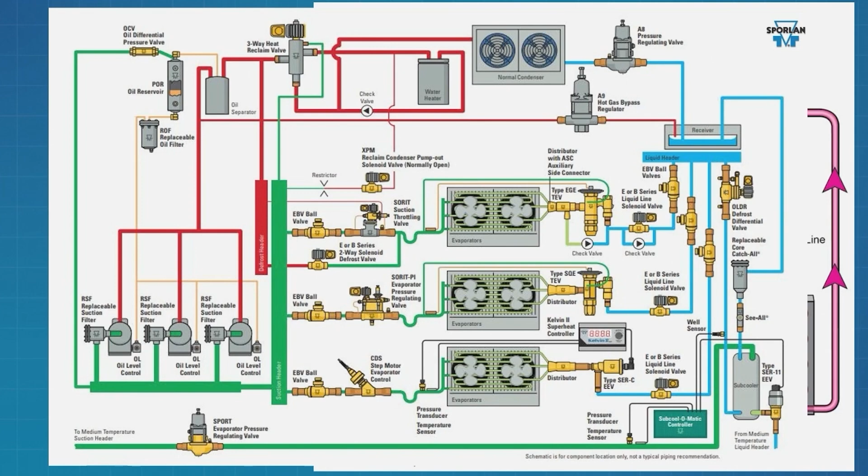So that's the concept, that's what we're going to be going through today. The chunk we're going to cover today, we'll see how the time goes—we'll drag this out if you guys have a lot of questions, and if you don't, we'll speed through it and move right along. There are really 4 parts of the refrigeration cycle and 3 major pipes between them. We're going to cover one of those parts and some of those pipes—that's about as far as we're going to get, and then we'll do this again next week. We'll pick up and take it until we get all the way through. Does that make sense?

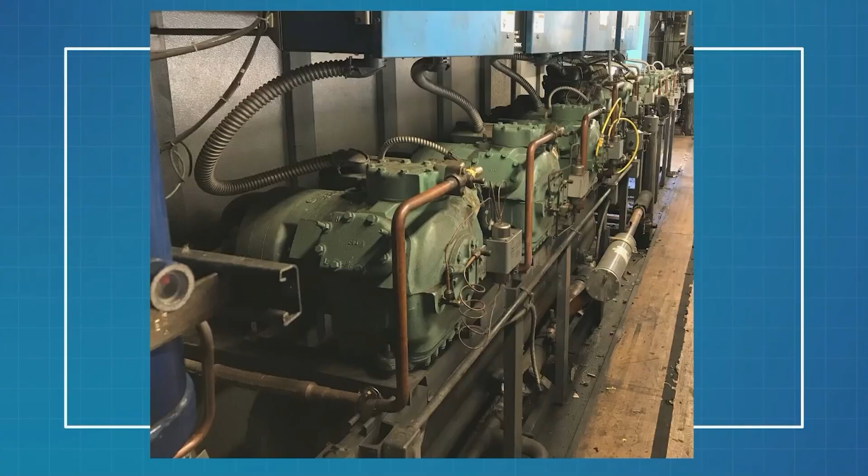The first question is, what is a rack? When we're all talking about a rack, you hear supermarket guys just say rack—what is that, what are we talking about? Well, here's a traditional rack. This is a pretty common setup, and really the concept here is we're taking a bunch of semi-hermetic compressors and putting them on a metal rack. That's where the term comes from. It doesn't necessarily look like that anymore—some new stuff definitely doesn't—but that's where the term came from. It's just a metal shelf that our compressors actually sit on, and that's why we call it a rack.

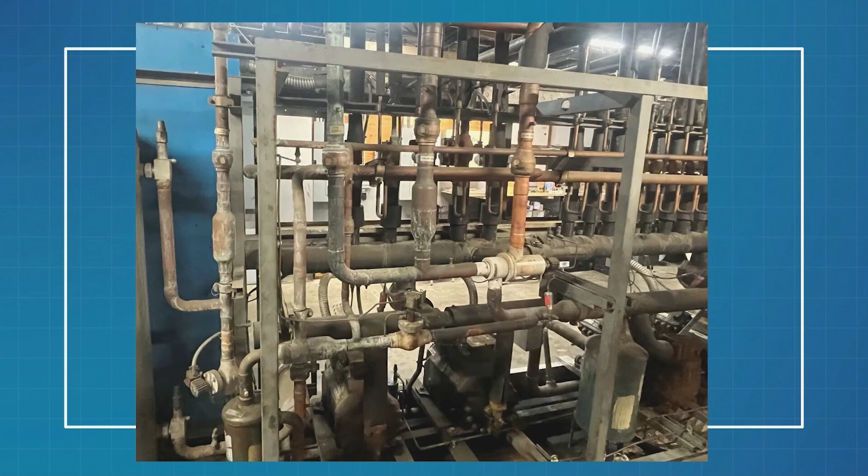So the other thing that's really common when we talk about a rack system, once we line out all of our compressors, we're going to tie them all together. We're going to do that through common headers. The header is a pipe that we run that ties their suctions together, so all the compressors share one suction, all the compressors share one discharge. That's what this picture is demonstrating. I've got compressors, and I can see these little pipes coming down from one common pipe. We call that pipe our header, and we're gonna have one for suction and discharge.

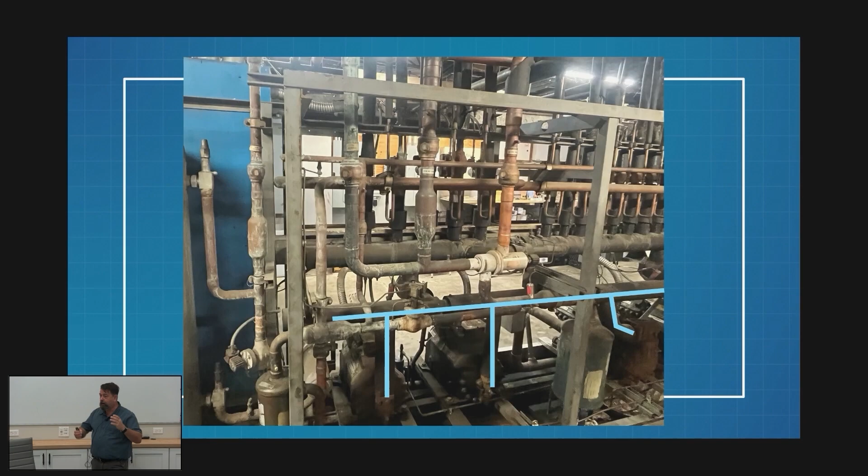So that changes the dynamics of my compressor. Once I take it from being on an individual circuit and pipe it together this way, I'm gonna get an average suction now. Instead of, as my box gets colder and colder, my suction pressure falls - that's what we're used to seeing on a single circuit - that's not gonna happen anymore, because now I'm averaging everything out. So as my box gets colder and colder, my load lightens, and instead of my suction just falling, I'm gonna turn off a compressor and maintain. So things start changing once we pipe them together this way.

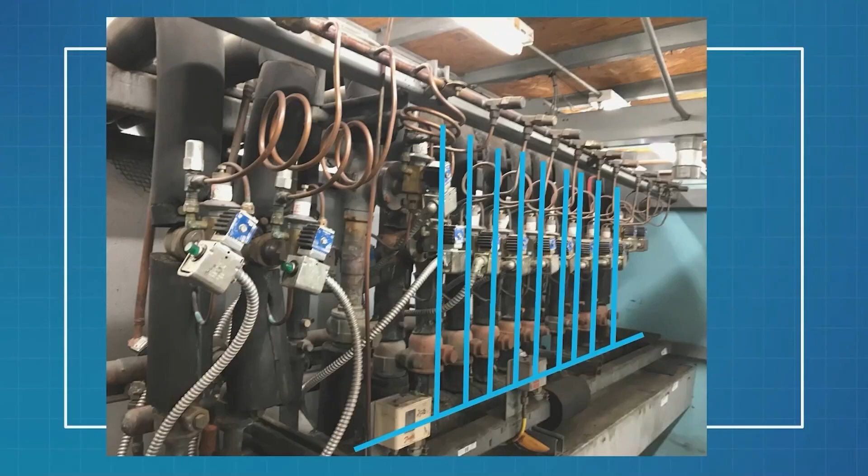The other thing that we're gonna do is the same thing for our load. Normally, on an individual circuit, I got one suction pipe that goes to one evaporator - that's kind of the standard setup. When I go to a parallel rack system, I'm gonna bring in all of my suctions, tie them into one common pipe, and that's gonna tie into that suction header for my compressors. I'll probably have two suction headers, one for my load, one for my compressors, and they will be tied together - they'll be the same pipe. Two physically different pipes, but one big one in between them, making them the same.

For you guys that aren't really familiar with supermarkets, each one of those pipes, each one of those blue lines, represents a circuit. There's probably up to 6 cases on each one of those lines. So just doing some quick math there, you can see 40 or 50 evaporators, something like that, is not uncommon. We can get up to 80, 82 to 85 is a large store rack system. They can go all the way down to 12. We've seen some pretty small stuff too. So it all depends on what the store needs.

So when we're talking about a rack, that's what we're talking about. Everything we're discussing today is that general setup. Now there are lots of variations on that - we're going to talk about the quote typical. What do you expect to find when you walk into a store and it's a supermarket? There's going to be variations, and here's the exciting part about this business: it's very uncommon that you find two systems exactly the same. There's going to be something different. Each one can be customized. Each one has had different things done to it over the years. Each one's trying something new. Each one's got - we just decided to sell lobsters here, but we're not down the street, so it's got a different setup. Those kind of things happen. So there's a lot of generalities that are the same, but a lot of each store is unique.

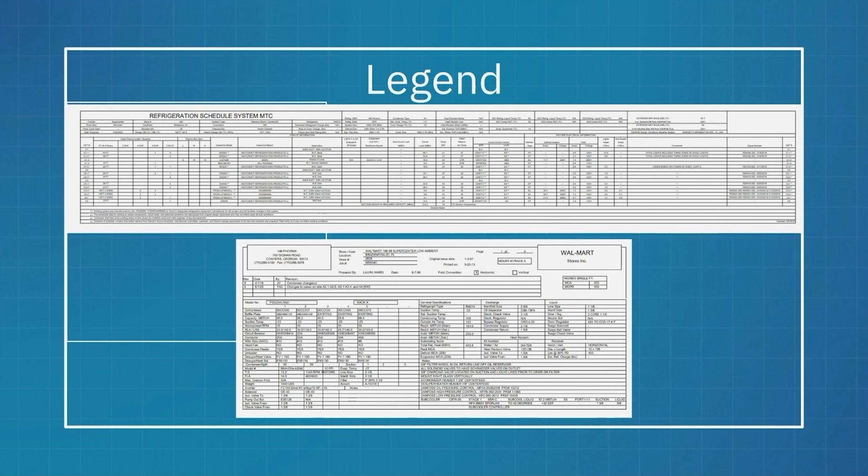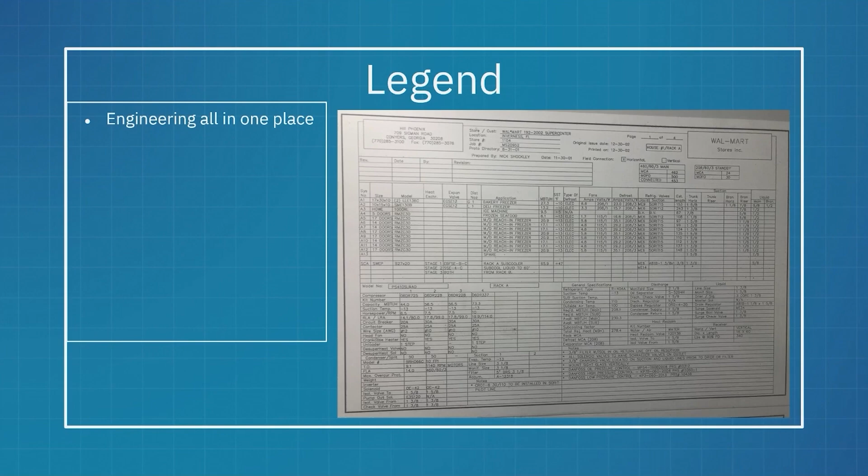My service techs walking into the 1984 store, probably not so much. This is what you're going to find instead. This is the bread and butter of a service tech. We call this the legend. I know you all thought I was the legend, but really that's the legend. Yeah, they don't get any better, by the way.

So the legend is taking that engineering we just looked at right out of the blueprints, and it's putting it in one place on one sheet. This should be mounted physically to the rack, and there's lots of different versions based on the rack manufacturer and the engineer who did the blueprints. But every rack came with this piece of information at some point. Now, whether it's been updated for new cases installed or not, that's up to the contractor who did that work. The engineer provided it.

But sometimes they don't get stuck to the door. If not, at least I know how it started. So let's go through it.

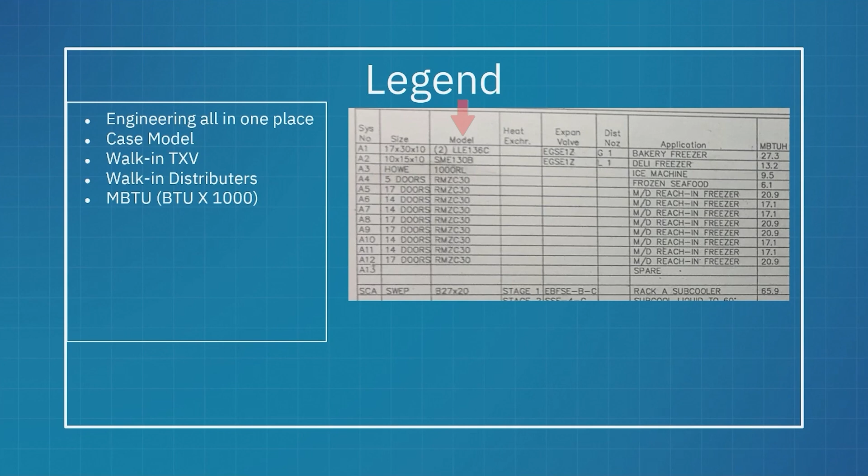Let's talk about what we're going to get out of this thing. In that case information, in that first top left-hand chunk, one of the biggest, most useful things I'm going to pull out is the model number for the case, which sounds ridiculous, but we do reskins quite a bit. When a case gets very beat up, we replace the sheet metal and the tag either disappears or may be wrong. Somebody had to print them out and stick them on the case that wasn't the case manufacturer, so it's very often that that's just not right. Case model number, right there.

Here's another one. How many times have you guys been working on a TXV in a walk-in box and wondered, is that the right TXV? Model number - Ryan has. Model number's right there. It's on the legend. You don't have to guess, you can look it up. It's right there.

The distributor - should I have number 1 or number 2? It's on the legend. You don't have to guess.

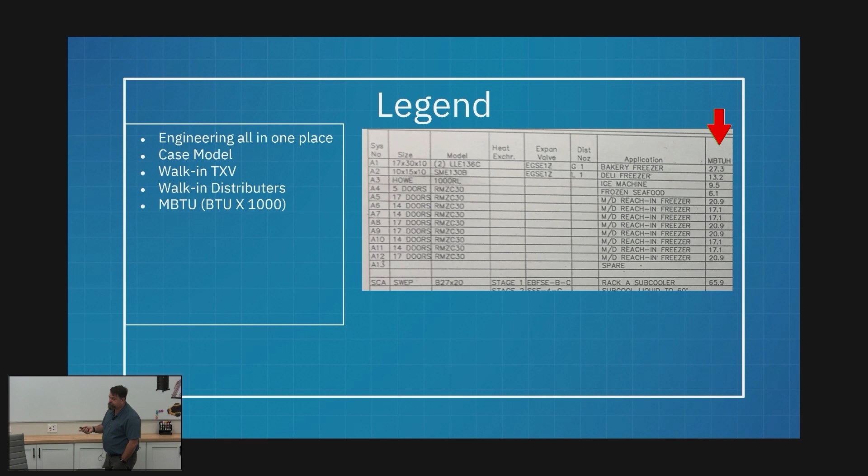The BTUs. So first off, on a legend, all of my BTUs are going to be written in MBTU. I just want to make sure you guys all know that's times 1,000 BTUs to get BTUs out of MBTUs. When we start looking at some of these loads, I think a lot of you will be surprised who haven't been looking how big these loads are, or how small actually. Some of these are quite small when we think they're gigantic - it turns out that they're 2 tons or 2.5 tons. But that's because our suction pressure runs much lower in refrigeration.

Teacher, question - this is just what you were talking about earlier, not a big deal. I was trying to get clear on my knowledge - you said a parallel rack. Correct. So my understanding back in the day was a parallel rack - you have 4 or 5 compressors, but they're all the same size. So you're thinking parallel because they're all the same size. The term parallel rack, and actually duplex parallel rack refrigeration, is what I'm discussing.

The term parallel comes because they're piped in parallel, not series. For instance, a compound cooling compressor that pulls in low, discharges interstage, sucks that back in, and then discharges out - that's series. A compound rack that does that, you've got 2 or 3 compressors that are low temp, they discharge to a mid-stage, then they use that mid-stage as suction for 3 more compressors and pump it up the rest of the way. It's not a parallel rack, that's a series - that rack is in series. When my racks have compressors all using a common suction header and a common discharge, they are piped in parallel. And there's your parallel rack.

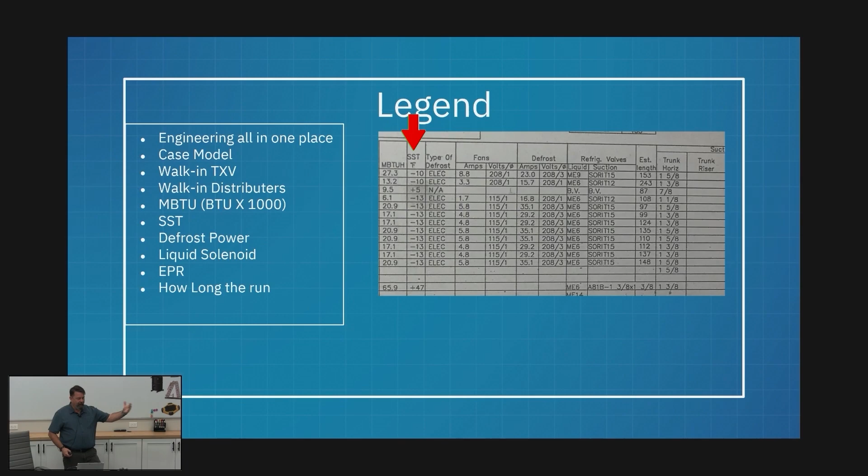Yes, we have customers that require the manufacturer to build equipment special for them. They buy it and say, oh, I love your Cadillac, but you know what, it needs wings. So put wings on it, and then we're gonna put our letter in your model number so everybody knows that one ain't the same as all the rest. Well, we find that constantly. So when you look online and try to get that case information, it's wrong.

The legend's right. It's gonna have your SST. How many amps should my defrost heaters be pulling? How many times have you guys asked that question? I got a heater out, or do I not? The legend's gonna give you that, it's gonna show you.

How about liquid line solenoids? We ran through a string of incorrect solenoids, right? Guess what? They're on the legend. You don't have to guess which size it is, or which EPR is supposed to be there for that circuit. It's on the legend. And then the last one is an interesting piece.

We don't need it every day, but how long is our pipe run? There are times when that is useful. When I'm getting ready to set an EPR and trying to figure out how much pressure drop I'm gonna have from my rack, where my EPR is, to my case, I might want to know, is that 87 feet or is that 215? That might make a difference. I'm gonna have a significant drop with that longer run, and I need to know that. So I'm probably gonna pull it up there.

Another reason I might use that is, I'm gonna pump this thing down, how much refrigerant am I gonna be moving? Look at this thing, it's 1 3/8 pipe and it's 300 feet. Yeah, it's probably not gonna fit in my 25. And the end pipe size, that'd be the next piece.

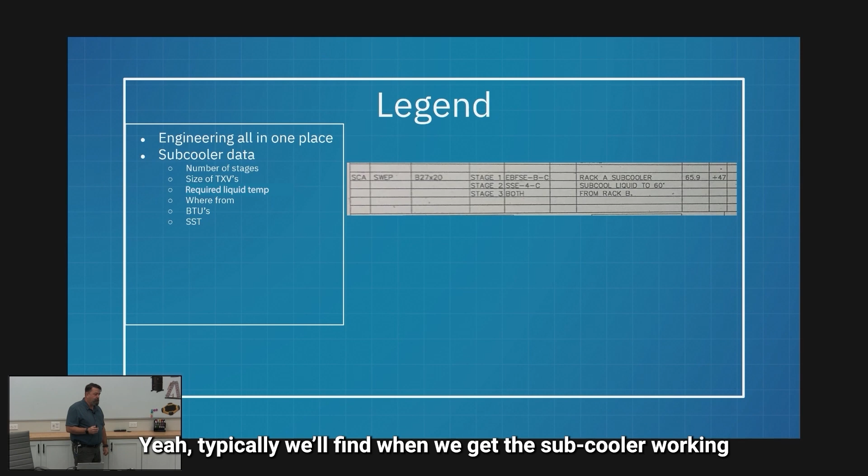The liquid must meet those three conditions before we can even begin to use the superheat data we're getting, before it's even meaningful. Typically we'll find when we get the subcooler working—because they're never working when we go—it's a giant problem.

You end up getting a massive flood back on a lot of circuits, and then if you go to the circuits in Tech Assist and see the work orders generated, there's usually a lot of work orders for that. That's because the subcooler wasn't working, nobody checked it, and you go to the expansion valves—every single one of them all the way open. Or you'll see every single one has a new expansion valve, and that's all the way open too, because they say, oh well, it's not working, I'm not feeding it.

Yep, the new one didn't work either. So change the TXV, open it all the way up, still got 20 superheat, gotta change it again. So why does that happen? What he just described, unfortunately, is not uncommon.

It's actually very common. You know why is that? It's mostly because people don't understand how critical a subcooler is. And that's why we're covering it, and we're gonna cover it in depth in this course. We're gonna go through the subcooler. That's why I'm showing you the engineering data.

All right, we can check superheat, but once again, we don't even know if it matters until we confirm those three things. Well, in order to confirm it is at the right temperature, I have to know what is the right temperature. There is no standard, it's always X. It's not. I think it's common.

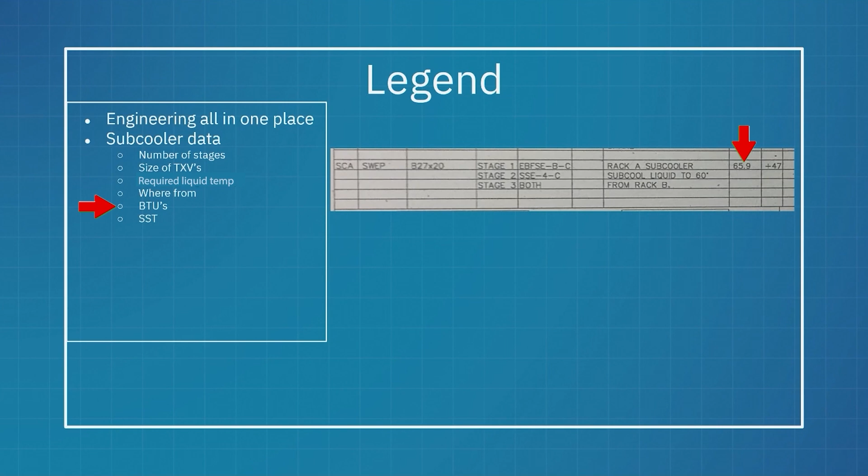So another interesting piece is BTUs. Out there on the right, 65.9 is my MBTUs on this guy. That's interesting. So what does that tell me? That's telling me how many tons of cooling I'm removing from that liquid line.

Well, every ton, every BTU that I pull out of that liquid line is equal to a BTU a compressor has to do. They're one to one. Well, the other interesting thing about this is it's telling me it's being subcooled from B rack, from a different rack. So that means I've got

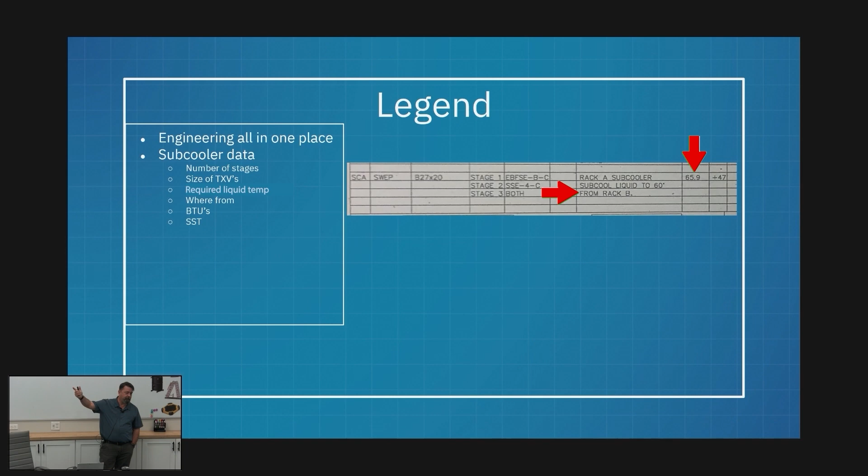65.9 MBTUs of work that's being done by a different rack. Let that sink in for a minute. That means if my subcooler's not working, it's turned off, that's 65.9 MBTU of compressor I need on this rack, I don't have. Oh, I don't have enough capacity. That's a problem. So if I want to know how much capacity I'm short, my MBTUs are right there.

That's about the only thing we're going to use it for, is figuring out what's going to happen when I turn this guy on, horsepower-wise. Or if I have to shut this off, how big of a hole am I going to be in? I can look at it and figure that out right there.

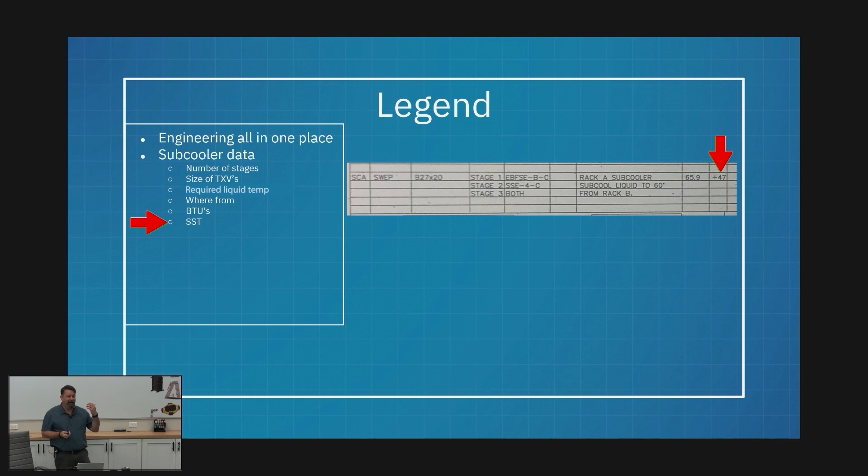The next one, off to the end there, 47. What's my SST on a subcooler? It's got an EPR, it's got a TXV. That means I can set it up just like a case. That means I need to know what its target SST is. This was 47. So this is a low temp rack, this particular legend that I pulled.

It's a low temp rack. 47 PSI, 47 degrees on my PT chart, that's above medium temp. Well, you guys know, we lose efficiency as we drop suction tremendously. So low temp rack, if I'm taking 65, 66 MBTU of compressor off of that, if I put that on that rack running at 7 PSI, you guys know that's going to be about a 20 horse compressor. But if I'm doing it at medium temp, that's about a 5 horse compressor. That's why my efficiency is so dramatic.

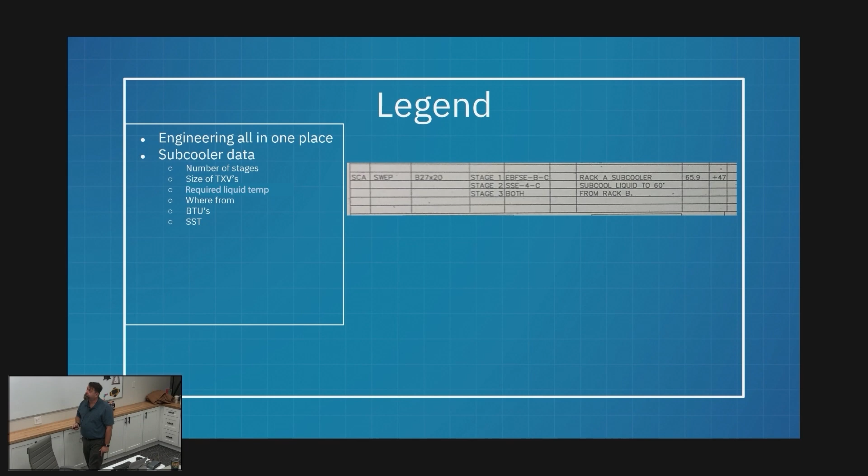That's why I have to use my subcooler. Okay, that's on my legend.

All right, my compressor data. This is one of those mysteries, right? We walk into a rack and I've got a compressor staging wildly, and this one's bigger than the guy after it. Doesn't make sense. Looks like somebody put the wrong compressor in. Happens. We get technicians who lose a compressor, they go to get one, they need it, it's an emergency. The rack's not maintaining. They call: we don't have a 228, but I got a 337.

Yeah, what's your pipe size? Yeah, it'll work, send it. Right? Sure it happens. But how do we know? How do we know that's what's going on? How do we know that's our problem or not?

Well, guess what? All the model numbers that are supposed to be on that rack are on my legend. So I can look, is that what I have? If it's not, and the program doesn't know that, it's staging incorrectly. My flows may be wrong. Maybe that's why I've got an oil problem, maybe why the whole rack's shutting off and starting back up, depending how grossly missized it is.

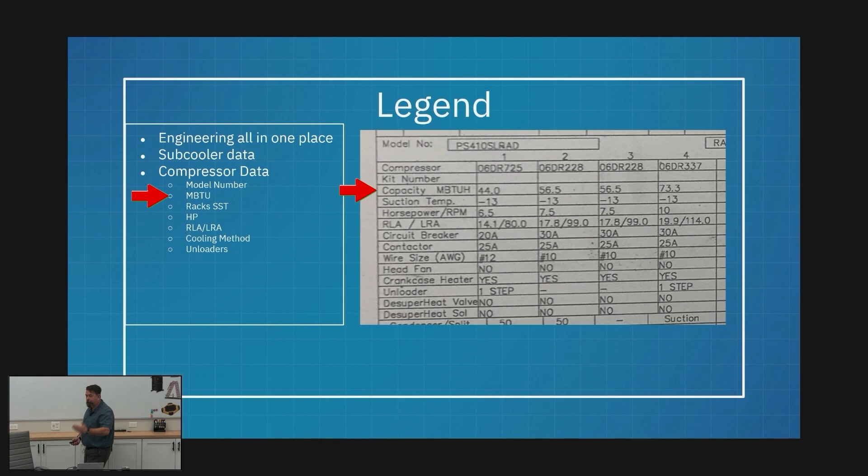But that's going to give you that data right there. It's MBTUs. Once again, this is fascinating - we think of these giant compressors as 20-ton, 30-ton compressors. The question is, at what suction pressure? The lower that pressure gets, those BTUs start shrinking for that same horsepower, right? That's right here - we can look at it and see, this is a 5-ton compressor, not a 20, right? Some of us did that in class recently, we went through that.

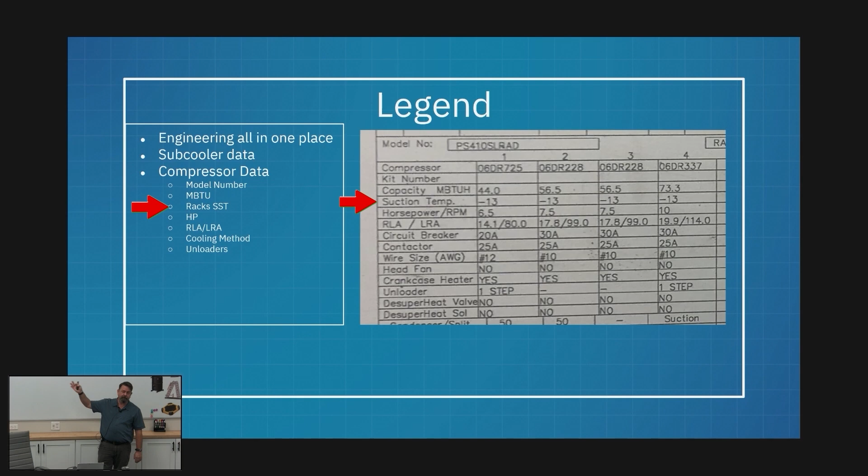The suction temp those compressors are designed to run at - they're all going to match the suction for the rack. This is the first place you can find it. You'll find it in a few places on this legend. But I need to know, what is this rack supposed to be running? I walk up, I'm sitting there at 25 PSI, my target's 25, everything in the store is running 8 degrees warm.

I might come over here to my legend and see what it's supposed to be. Oh, somebody fat-fingered that - it's supposed to be 15. Somebody hit a 2 instead of a 1. How do I know that? My legend right here is going to tell me. This rack is a minus 13 degree rack. It's going to give me the horsepower for those compressors, and it's going to give me all my electrical data.

RLA, LRA - you guys know your lock rotor amps is 6 times your run. I don't know if you guys knew this. Often on your compressor data sheet, it'll give you one or the other - does it give you both? You can figure them out by dividing and multiplying. My legend will have them both though, just so you know. That's true for everything, not just compressors - fan motors, everything else, cooling.

So we're going to talk about cooling and compressors here in a minute. But you walk into a rack and there was a head fan - you can see that somebody has removed the head fan, right? Is it supposed to have a head fan? I don't know, my legend will tell me that. Why would that have happened? Well, either the fan went bad and the tech pulled it and didn't replace it, or I've had a refrigerant conversion and my head compression's changed and that compressor no longer requires that.

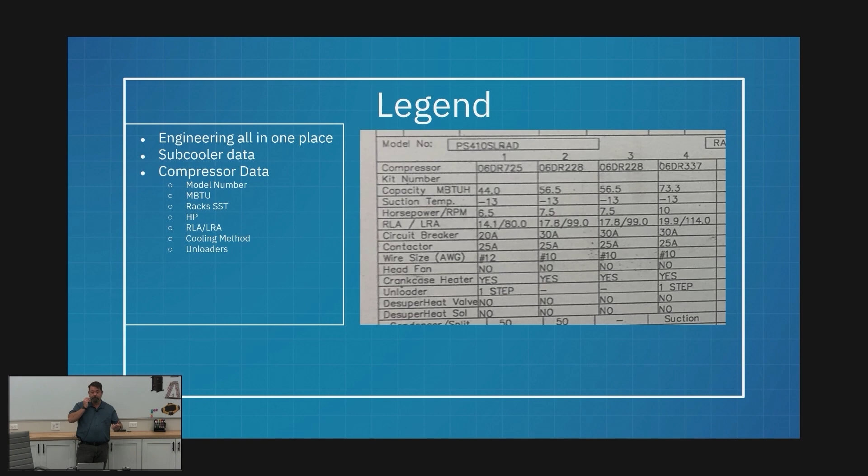But your unloader bolts off the old compressor. You can get a regular compressor and move the unloader yourself. Give them that model number and they've got three in the shop, you can have them in an hour. So just know that - if you've got an unloader, it's gonna slow down your order significantly. If you've got time, it's no big deal, but if it's something we want to get going, have them get you the model number without the unloader and move the unloader yourself.

The other reason I need to know if this compressor came with an unloader is because of that - technicians pull out a compressor with an unloader on it, don't move it, and just put in the regular compressor. Happens all the time. Time crunch, whatever, make 50 excuses, but that's what happens. So I walk in and once again I've got staging problems, and we'll talk about why that's a problem as we get going.

That's one of the things I'll need to know - you'll hear me ask, did you validate your horsepower? What I mean is, when we're looking at swinging suction problems in a heavily cycling rack, do you have the right compressor? Is it the right size? Does the computer agree with the size sitting on the rack? Is that compressor delivering that horsepower? Do you have bad valve plates? Do you have compression problems? If it thinks it's a 20 horse compressor and that compressor's only giving you 15 because one of the pistons ain't moving, we need to know that.

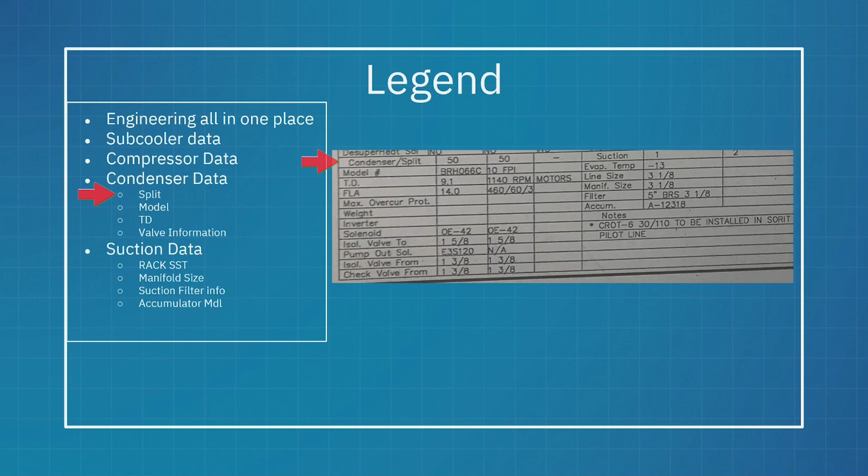The other bits on here are my condenser information. For us down here we'll get into low ambient controls - we'll talk about that, probably won't get into that today. But 50% splits, 25% splits, are they active? Were they installed originally? That's all gonna be in here. Model number - you guys know those 20-year-old condensers, you can't read a thing on that plate, it's just white, you can barely tell that was the plate. Well, the model number's right here, it's on my legend.

The TD - so when I'm trying to calculate, is my condenser working? Does it work? I need to know what my TD is. I'm gonna measure that and know what TD it's producing. Is that right? Four? Does that sound good? Yeah, that sounds great. Maybe it's 12, I don't know - my legend is gonna give it to me, I don't have to guess. That's a summer problem, not a winter problem - that's the 325 head, I'm trying to figure out why.

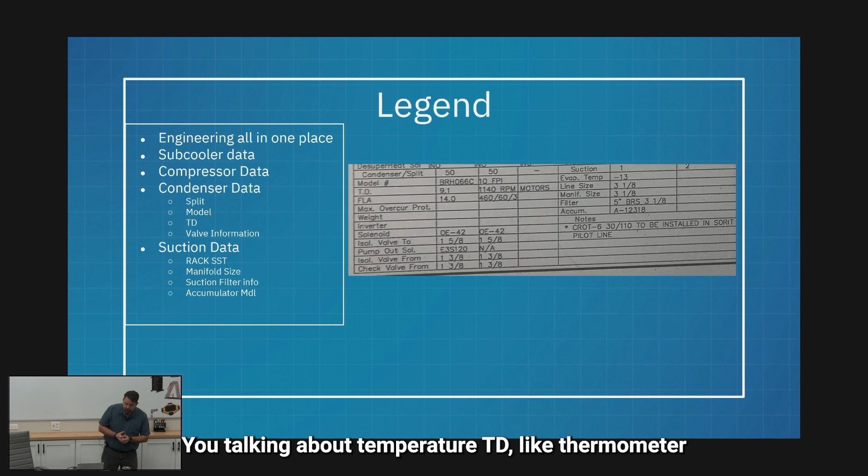That's where I'm at. You're talking about temperature TD, like thermometer? Yeah, my refrigerant coming in versus coming out. Oh okay, so you're saturated.

Not your TD. And then your other—there's a delta T, and is my air blowing through versus my refrigerant coming out.

When we're trying to understand have we lost capacity, are the fins rotted out, if we're not exchanging heat, it's full of oil, something's going on—we're gonna know that by measuring the delta, the air blowing through my coil versus the temperature of the refrigerant coming out. How many degrees is that?

Right, how does that change? Okay, and then the valve information, all right? So there's tons of valves on this thing.

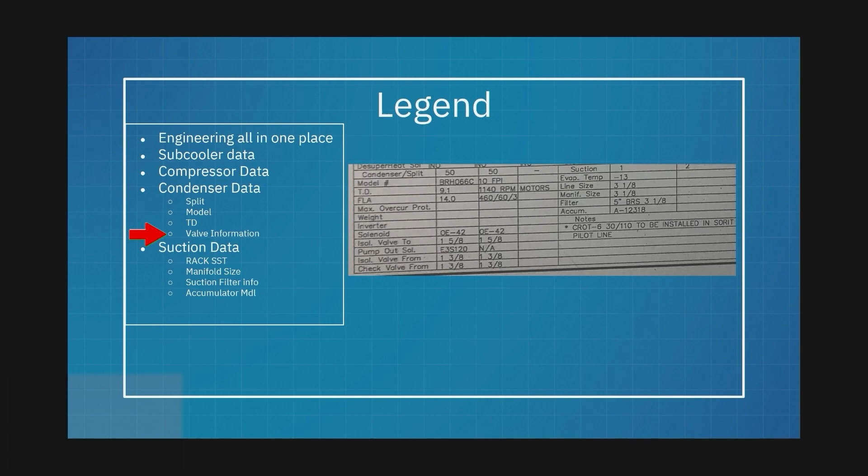I'm gonna have solenoid valves that are normally open instead of normally closed, and we'll talk about that. That means I better get the right valve. Just think about what I just said—hot gas going into a condenser through a normally open solenoid. That solenoid fails, I walk into a store, hey I need 1 1/8 inch. Normally closed, that's what they're gonna give you.

Every time, right? So I gotta have the model number on that. It's on here—the check valves for my 50% splits, on here. The solenoid valve for the bleed off line, it's on here. I don't have to guess, right?

We just went through this whole thing with solenoids recently. Their size matters, right? Their capacity matters—if I'm grossly oversized, it won't close. If I'm undersized, it's a restriction, the hole inside is smaller than the pipe. If that happens and I get the wrong one, it's just not gonna work.

When we're talking about pump out solenoids on a condenser, I don't have any idea how many BTUs that thing's moving, right? Guess what—I don't have to. Somebody else does, and they did that math and typed their answer right here on this sheet.

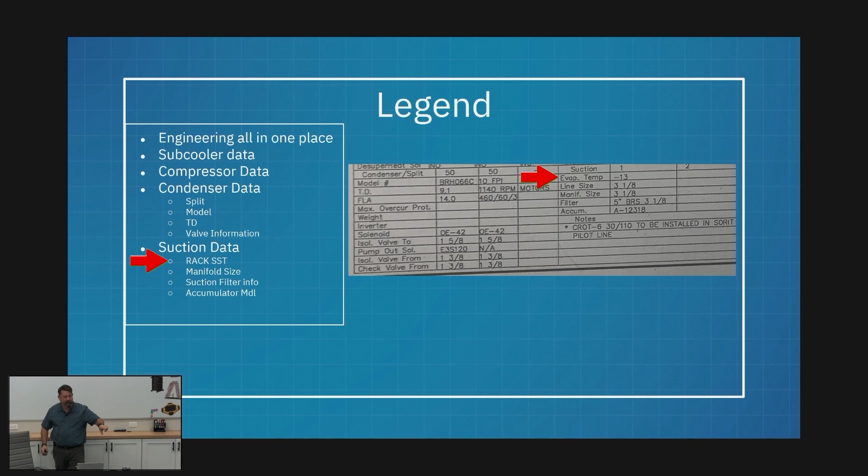Okay, suction data, the rack SST. This is where the official—this is a minus 13 degree rack. When we start talking about racks, what's your rack? I got a minus 25 rack, I got a minus 23 rack. We're not talking about supply air on my coldest case, we're talking about what is that SST target that rack runs at. Remember, our suction pipe is a common pipe between all of my compressors—that's the pressure I expect to find in that manifold is my design SST. In this case, it's minus 13 degrees.

So the other thing I've got to know is my refrigerant type, right? I take my refrigerant type and plug that into my PT chart, and that will tell me the pressure I should find on that manifold. Is that calculated off of midpoint? PT Pro's the way to go.

All right, so yeah, we weren't going to get into this but you brought it up, so here we go. The question he just asked is that based on midpoint? All right, so let's talk about glide for a moment, because this is definitely one of those things that guys stumble on. Talking about glide—good old R22 has no glide.

So when I'm taking superheat, taking subcooling, setting EPRs, setting up my suction on my rack, it's the same number—my PT chart gives me one number, I just use it. Guess what, CO2 is that way too. One of the nice benefits of going back to CO2 is no glide, right?

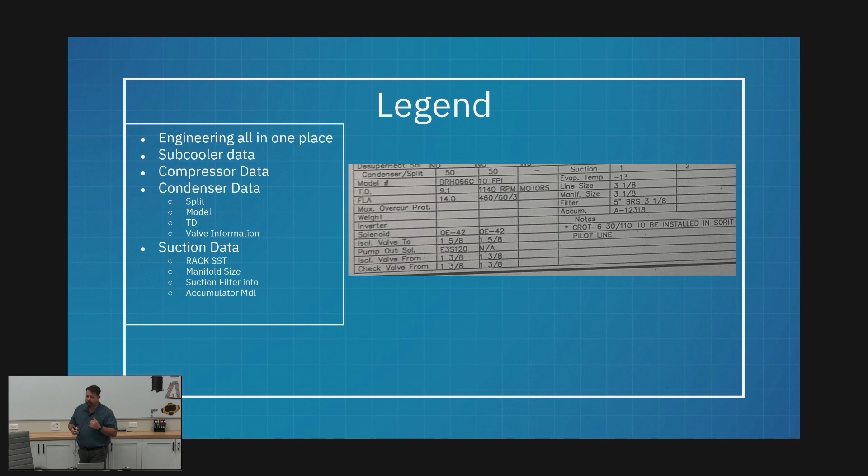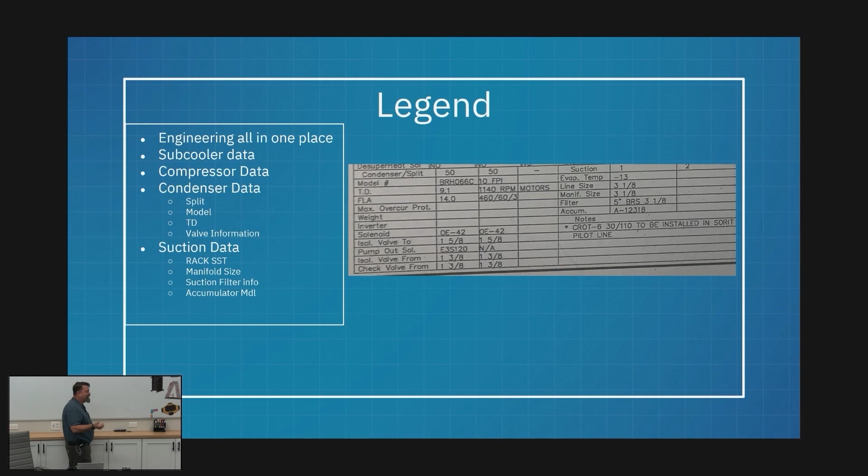Now the other side of that is condensing. The exact same thing is going to happen. It's a different refrigerant, but the one that condenses first is the one I want to measure first. That's my bubble point. So when I'm figuring sub-bub, subcooling, bubble point - subcooling, bubble point - those two go together. That's the other end of my glide. Now that leaves me with one more value that we need.

If I pick up a drum of refrigerant out of my truck and I strap a thermometer to it and hook my gauge up to it, is that going to give me dew point or bubble point? Neither one. What the hell is going on?

Neither one. When I am at saturation, I do not have bubble or dew. I am literally halfway in between, right in the center. At saturation - when I say saturation, I'm talking about having liquid and vapor present at the same time in the same place. If I have liquid and vapor and I add heat, I'm going to boil refrigerant. If I have liquid and vapor and I remove heat, reject heat, I'm going to condense some of that vapor into liquid. That's going to give me a nice, stable, predictable pressure-temperature relationship that we think of as the PT chart.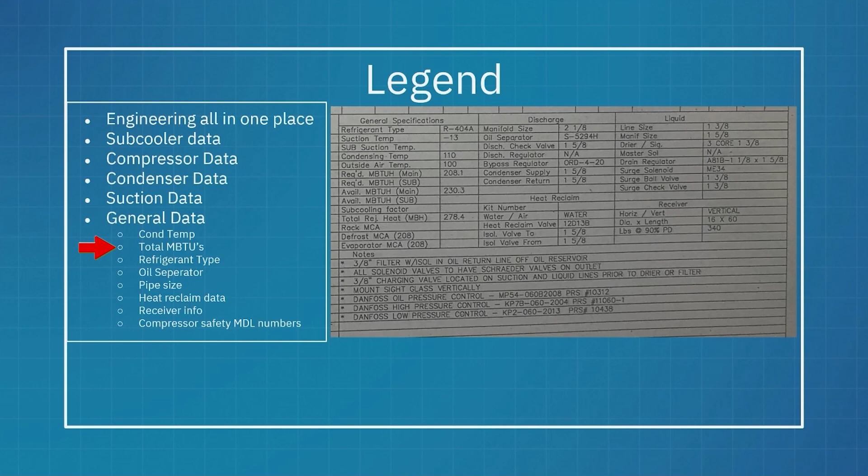Total MBTUs. Interesting to know, it's one of those things we just don't talk about. I got a 40-ton rack, right? I got a 120-ton rack. Do I? I don't know. Never looked. Well, now you know you can.

My refrigerant type, all right, this is the big one. This is probably the most important thing on the whole damn sheet. All right, we change refrigerant types so many times in these stores with these conversions. We're doing it all the time. How many times have you walked into a store and you just didn't know? Right? You look, there's a tag that says R22 on that thing.

There's something that says 404 in the corner, but there's an empty 447 bottle, so then I got mystery gas over here. I don't know what the heck is in this rack, right? How am I calculating superheat if I don't know which PT chart to use? PT current? No way. If I've got to add refrigerant, come on.

Or we could look at the engineering, right? And that's what you hear everybody say. Look at the engineering. What's your engineering say? I don't know. Where do I look? On my legend, and it's going to be in this bottom right-hand corner of my legend where my general information is, where those notes are, right?

The oil separator, pipe size, heat reclaim data, receiver information, compressor safety, the compressor safety model numbers. I wanted to point that one out for a minute.

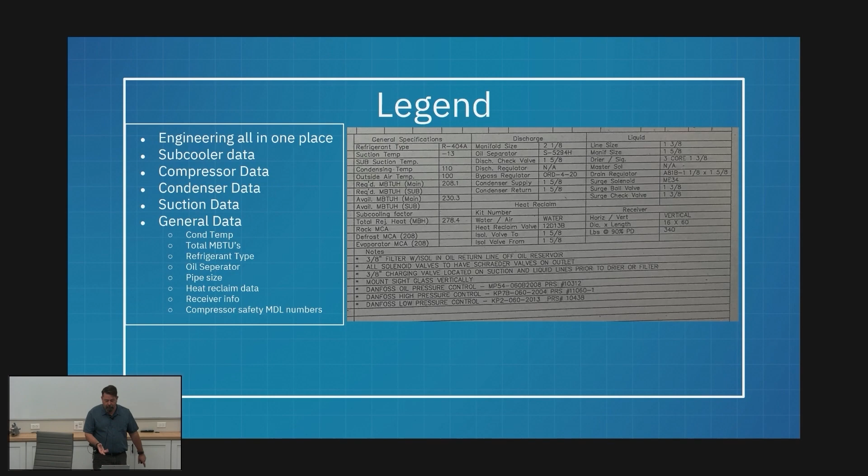You guys have been through my compound class, and you've heard me talking about the difference between oil safety for a Carlyle and a Copeland. They're different pressure. So that leaves us in an awkward position of standing in front of the counter at United saying, I need an oil safety, and he's pulling it out, and me going, that's a 9 PSI, I need a 6.5. He's like, what? Well, I can give him the model number, it's on the legend.

Let's talk about the refrigeration cycle for a minute. The first piece that I want to cover, when we talk about our systems, we're talking about DX. We've all heard that term, DX. What we mean is direct expansion, all right? That's what DX stands for.

When we say that, we're talking about this refrigerant cycle. There's other ways to do refrigeration, absorption, flooded evaporators, all that kind of stuff. When we're talking about taking a refrigerant and putting it through our metering device and it changing states, that's the expansion, okay? Direct expansion, that's what we mean. So when we say DX, we're talking about this. When we talk about other things, we're not talking about this, okay?

Now, the reason why I'm clarifying that is because our parallel rack systems we're going to talk about today, this month, are going to be all DX. That's what we're going to be discussing. We do have a few alternatives out there, and we'll talk about those too. But as long as we're talking about DX, there's a couple things we need to be sure we understand what we mean when we say it.

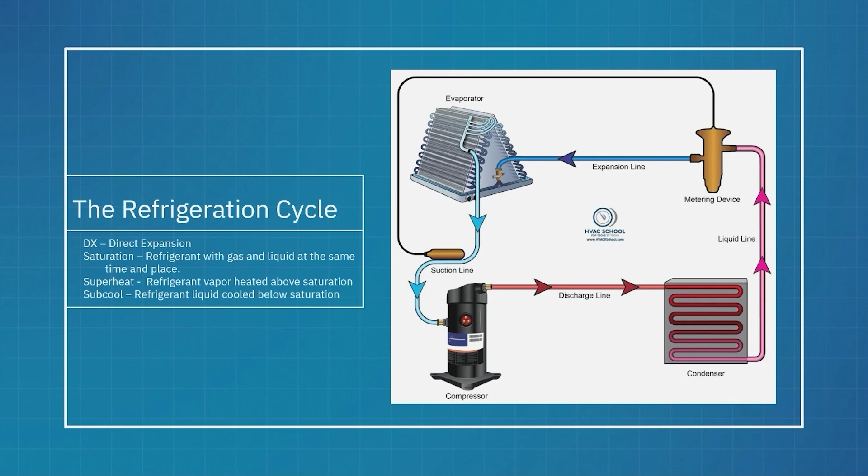So we've got to understand these principles. They're basic, simple principles that we were taught back in air conditioning school 101, back in the early days. They still apply today. This refrigeration cycle is our refrigeration cycle. This applies to the ice maker in the dorm room that's cranking out half a pound a day, or that 182 case rack. They work exactly the same way.

So just as a review, I'm going to run through this very quickly. This is not a refrigeration 101 course, but I am going to point out the key components of this, what's happening there, and then we're going to go through a rack and do the same thing.

All right, so let's start with compression. The compressor is the heart of the system, so to speak, right?

It's creating a suction on one side, a low pressure, and a high pressure on the other. My refrigerant in the entire system—there's no pump moving that refrigerant. The way that refrigerant moves through the entire loop, everything beyond that is flowing from high pressure to a lower pressure. High pressure will always flow to low pressure. My compressor is simply creating the highest pressure at the outlet, and the lowest pressure at the inlet. So the refrigerant that is discharging is going to find its way to that lowest pressure.

That's how my refrigerant moves, that's what causes it to move. My compressor is not pumping that refrigerant, it's creating a high and a low pressure. Okay, we call it the pump, sure, but pumps move liquid. That refrigerant coming out of that compressor—what state is it in?

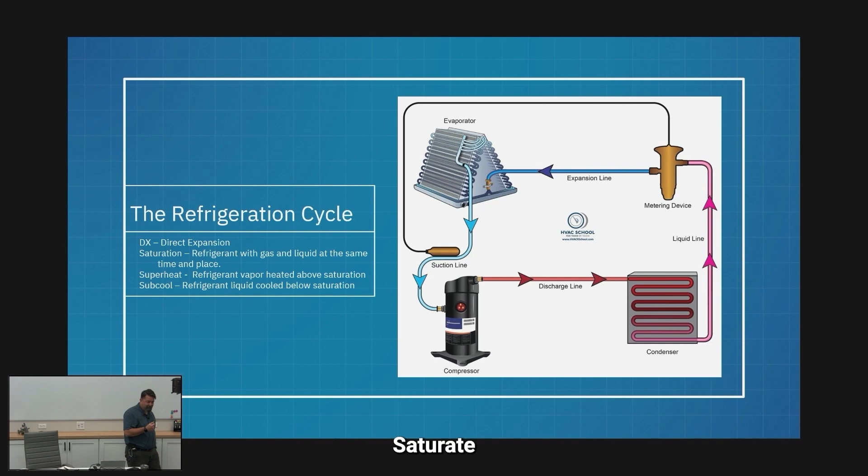Sir? It's not a liquid or a vapor, it's saturated. All right, so what's actually happening inside of my evaporator—he's making a point. I'm not boiling it all off yet. It's actually coming out of that expansion device, and this is air conditioning more than refrigeration, where you sometimes get that pipe that's showing on that drawing, that expansion line, they call it.

In our world, that would just be the distributor. That's all we've got—we don't have any piping there, but we may have a distributor. In that distributor, what I'm going to have is atomized refrigerant, little tiny balls of liquid. That's what I actually have, with some vapor.

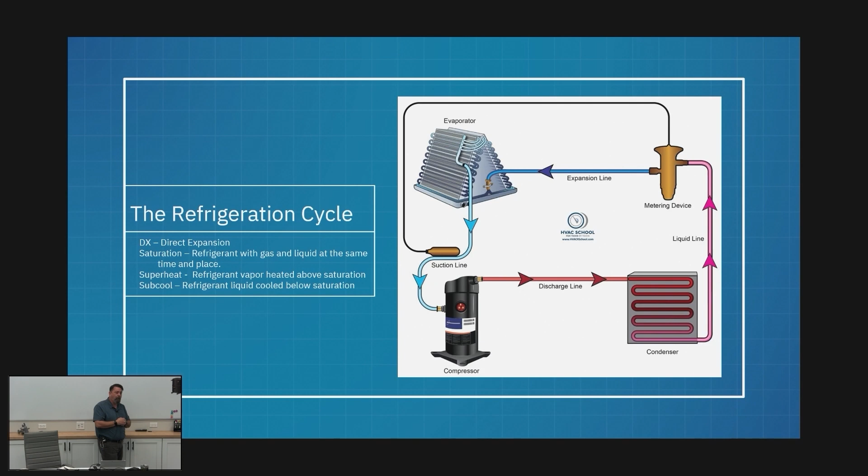And that's going to flow into my evaporator, and I'm going to flood. The majority of my evaporator is going to be liquid—the overwhelming majority of it. Depending on the efficiency of my evaporator, that's going to determine my superheat, what percentage of that I'm actually changing state in. So ballpark, around 10% or less of that evaporator is vapor. The first part is 100% liquid, the last part is 100% vapor.

Everything in the middle is going to have refrigerant boiling out of it, so it's going to be different percentages. As we work towards the top, obviously a higher percentage of vapor. Go work towards the bottom, liquid. That's how that works until I absorb all the heat that I can.

I have now changed state of that refrigerant 100% to vapor. I've left my SST. Once that's happened and I continue to add heat, I am adding superheat. I was at saturation and I boiled off, so I'm 100% vapor, and I keep adding degrees, superheat.

Is it true that for 400 blend refrigerants, manufacturers want more of a flooded coil? So typically around 3 to 5, sometimes you've got to get to that to achieve what they want, compared to like if you're doing R22, where you might get away with like 8 to 10. Honestly, I don't believe it's got, and I may be wrong about this, as much to do with the refrigerant as it does with coil efficiency.

All right, so let's back up for a second. Superheat - every degree of superheat that I add, my compressor is going to have to discharge into the condenser, and then the condenser's got to reject it. Every degree of superheat I put in, I have to spend energy to take out.

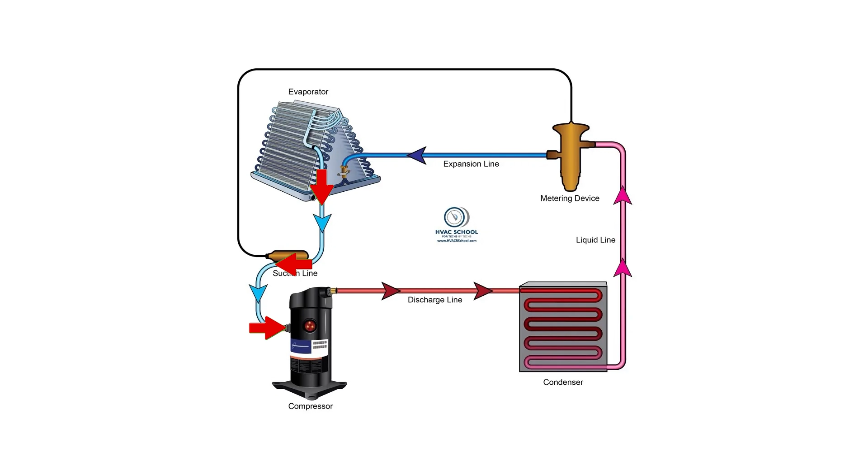That is so cool. So anyway, we're coming out of our evaporator with now cold refrigerant vapor that is technically superheated, based on the temperature of that evaporator, which will tell us how cold. And then we're going to feed that into our compressor - now we've completed our loop.

Everyone has seen this a thousand times. This particular one, probably even more than normal, because it's from HVAC School, if you notice. Had a few choices there. Does that look a little more similar, right?

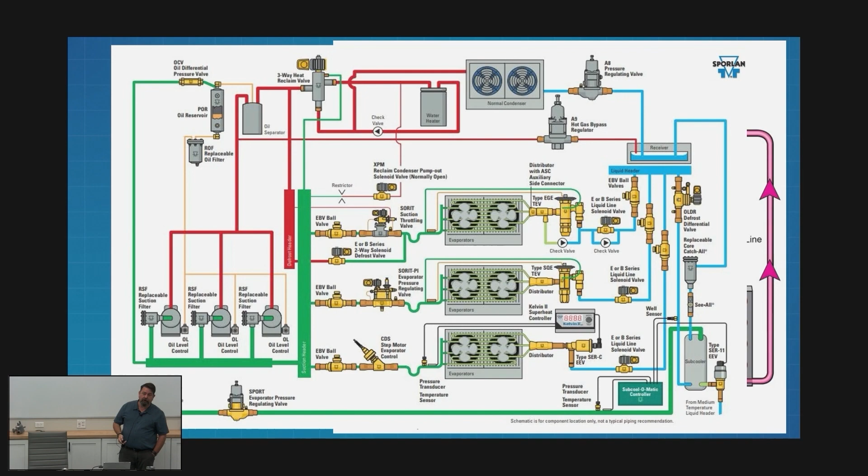So here's the same drawing. For you guys that are not familiar with supermarkets, we can see we have 3 evaporators there. They're just showing us 3 different ways to control that. That's the part that normally we would have 80 something, or 40, in there.

All right, so here are my parts. I've got compression on the left. The red line is my superheated discharge, going up to my condenser - that's the second circle up there. I'm coming out of my condenser as a subcooled liquid - that's the blue flowing down.

It's flowing to my TXV. I don't have that expansion line between my TXV and my evaporator - I just have a distributor. So I've only got those 3 parts, and then it's going to flow right into my evaporator, and I come out with the green line right to my compressors. Boom, there's my loop. It does exist - it is supermarkets.

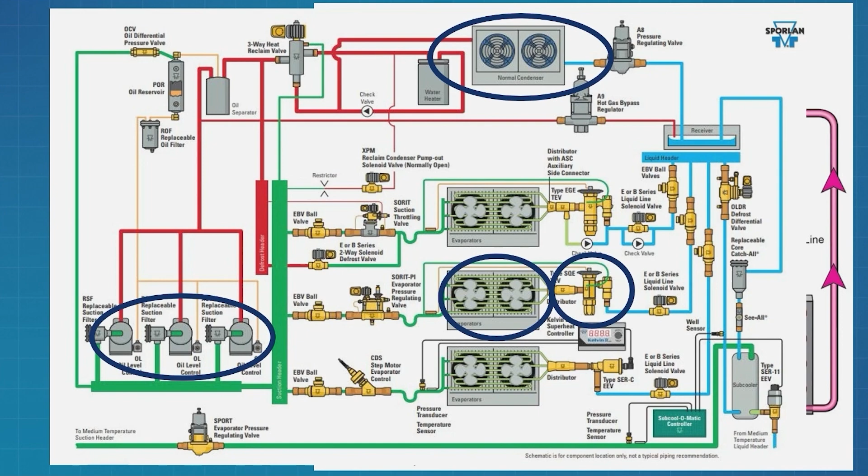We've got a couple other things going on. We've got a few valves in these pipes, and that's what we're going to talk about. We're going to go through these chunks - what are these chunks, and how do they apply to us?